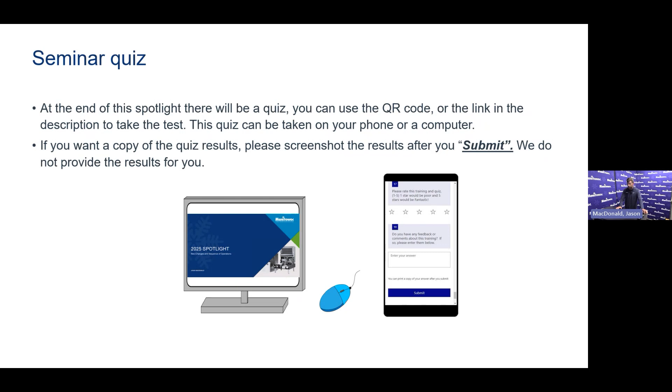All right, so what's different? What changed? Because the name didn't. Well, the refrigerant did, for one thing, but also the air filter now pulls out from the front. We have onboard water filtration. That was the big game changer to me.

You've been there, you've installed these machines. Sometimes there's not a lot of room to get the ice machine in place, let alone filtration. So now it's on board. And the thing that I really like personally is that's an auto bypassing head. Turn that ice machine off, pull the filter out, turn it back on. So, hey, the customer didn't have a filter sitting in the back room.

You didn't have one sitting on your service van. You're there to do some service work, preventative maintenance, corrective maintenance, just some sort of maintenance. That's what we do here. Well, filter's plugged. You can't tell a customer on a Friday night that their only ice machine is down because of a water filter. Well, you don't have to with this one. So, turn the ice machine off, take the filter out, and then just turn it back on. Come back on Monday with a filter and you're good.

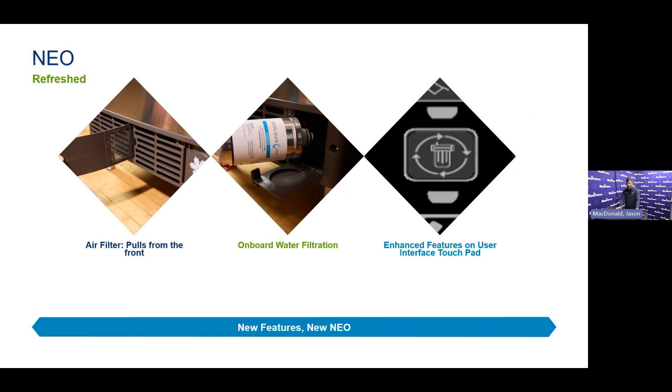We've also enhanced the touchpad. So you're going to see that here in a bit. We're going to take the dual screen off and we're going to show you a little bit about the ice machine. One of the big things that you're going to notice between our refreshed Neo and the previous iteration of Neo is that we've embossed the Manitowoc name into the door. So just coming from a distance, you're going to see that there alone.

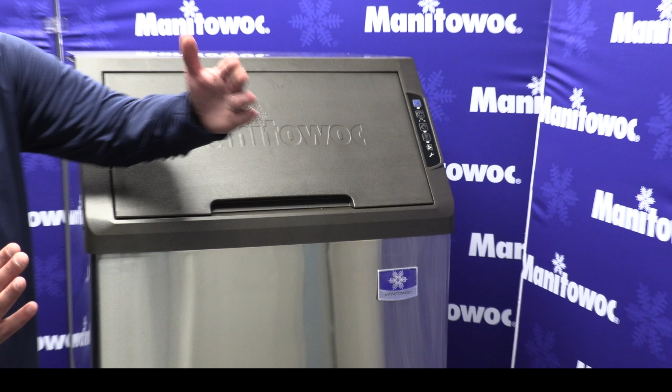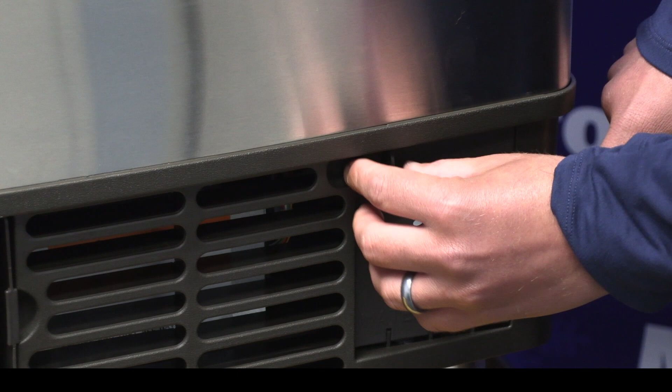And obviously the touchpad is different, which we'll show you a little bit more once we go back to the dual screen. And the big key here, this filter door. You're going to see the snowflake. That's where your water filter's hiding. So just pinch this door, this little tab here, and the door will come out.

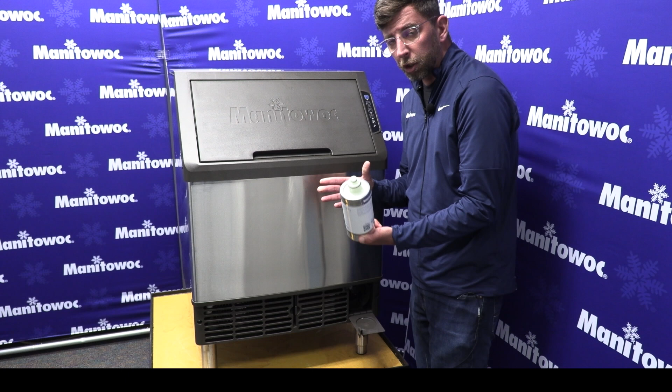Turn to the left, it removes the water filter. Get yourself a new filter. Go ahead and put the old filter off into the recycling, the garbage, whatever you have to do. Put the new filter in and turn until it seats. Push this door up. To get that click, I'm a big fan of pushing right here because you get that nice snap action right away.

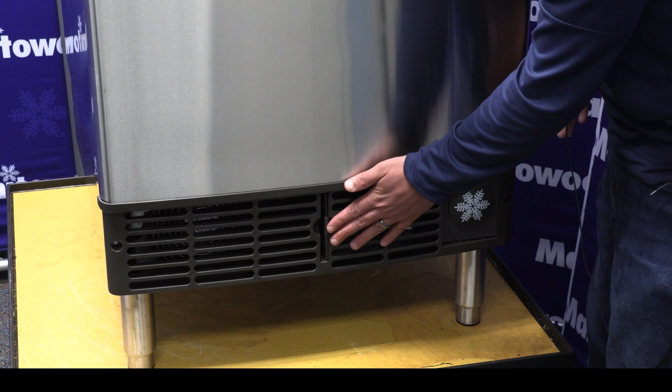Another thing that's different, as we discussed, the air filter pulls out of the front. To me, that's a big deal because on machines that did not have the front pull air filter, if you installed this ice machine without the legs, that tool-free access when you're pulling it down from the bottom, you lose that. So now, legs, no legs, just pull it out of the front.

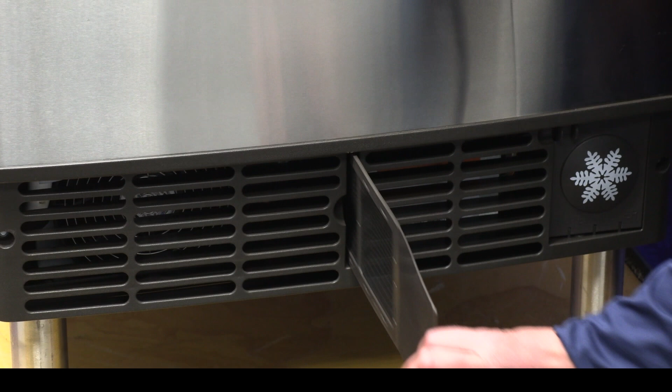And it's there. You can take this over to a sink, you clean it up real nice, you bring it back, you put it back in. Have to stress this part though. This is not keyed or poka-yoked in a way to prevent me from putting it in backwards.

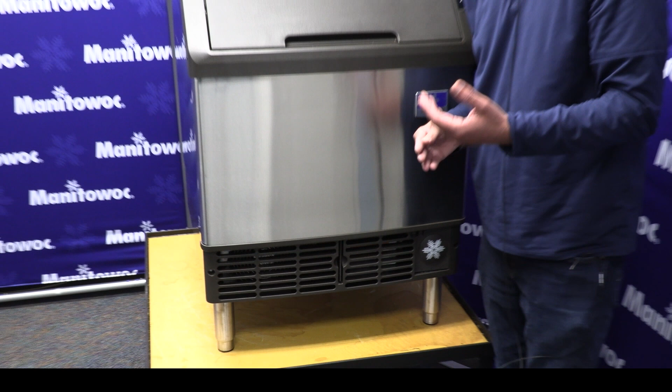I just put the filter in backwards. Well, that hard plastic there is covering about 25% of your air condenser. You don't want to be covering 25% of your air condenser. You want a clean condenser, breathing and being protected by an air filter. So take that back out, let's put that in correctly.

And it just runs along a track sitting there by the condenser. So those are the big differences you'll see on the machine. We're going to head back over to the desk and go to the split screen so you can see everything else a little more closely and more appealing.

So let's talk about what changed with the touchpad. We showed you that there's an onboard filtration light. Well, we're going to tell you about every light first.

So the on-off button, that blue button at the top, push and hold it for 3 seconds and let go. It's going to turn that ice machine on. You'll be able to tell because the blue light underneath will have turned on. Now we're in a normal sequence of operations.

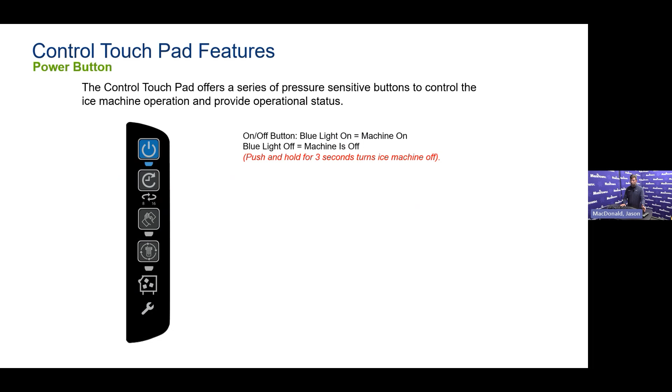Our delay button. Keep in mind, you cannot delay this ice machine when you're off - you're already delayed, until you turn the ice machine back on. So you can do a couple of things here. You can press it once and let go, it goes to 8 hours, then to 16 hours. Press it a third time, it turns it off.

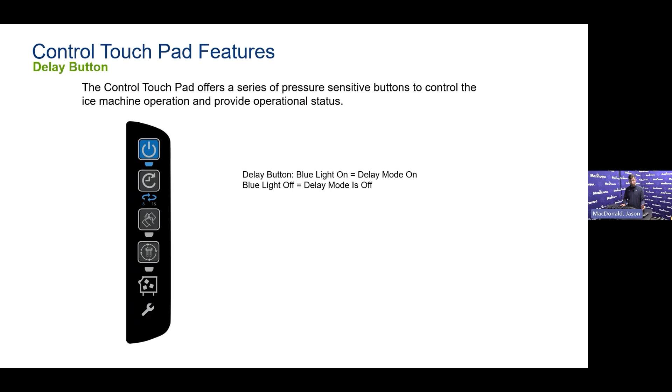But we have a repeat symbol there above those numbers. So push it, we're back to 8 hours. Now push and hold it, and the repeat symbol will come on. So now this machine will delay itself every single day from this point on for 8 hours, or until someone decides they don't need the delay anymore - they need 24 hours of production or anything else.

The clean light. We get this one a lot in technical service. Ice machine will not go into clean. I've had this call myself. The first thing I've always asked that person on the other end of the phone is, what's the ice machine doing right now? And the answer we usually get is, well, it's making ice.

How much ice is on that evaporator? Any? No, no ice on the evaporator. Well, turn the ice machine off. Turns the ice machine off, pushes the clean button and holds it. Lets go - the yellow light lights up and the machine goes into the clean sequence. You cannot go into clean from an ice making sequence of operations. You can only go into clean from the off state, which is not part of the ice making sequence of operation.

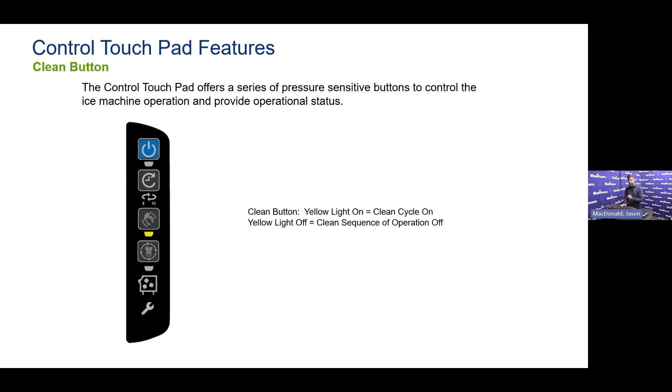But now this filter light - that's going to come on after 4,000 cycles. It's going to light up blue, telling you hey, it's time to change that filter. Now, this is not a timer - this is based on actual cycles, drops of ice. We froze ice, we harvested, drop - that's 1. It's going to count up to 4,000. At that point, that would have been 6 months of consistent operation, never shutting down because of full or anything else of the like. So 6 months, you're going to get this light to come on, but really it's going off a cycle count, letting you know it's time to replace that filter.

Now, what do we do with that? Well, you replace the filter and then you push and hold this button for 4 seconds. You just push and hold, let go. It's now going to create a flush and activate the carbon inside of that filter. It's going to energize the water inlet valve and the water dump valve, so that way it can get through and activate that filter for you, so it'll actually filter that water and allow water to come into the ice machine. That's going to take about 5 minutes. Turn the ice machine back on and let it start running. We have now reset that counter.

Now, we do not have a thing for you to see on this one, but if that light comes on and you know you're running off to the part house tomorrow to get a new filter, all you can do is push that briefly, 1 second, just push, and that light will go out for 24 hours. And there is a handshake that you could do to turn that light off entirely - see the installation, operation, and maintenance manual or your service technician's handbook.

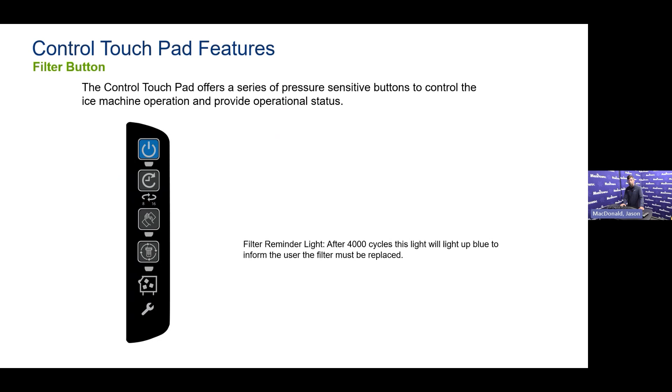If your customer has a full building solution for their water - reverse osmosis, anything else - that you do not want to be utilizing this filter because you've already purified your water, you push and hold the clean button, you push and hold the filter button, and you push and release the delay button, and it'll deactivate that light.

Now, my favorite light, the full bin light. This one is great from a distance for the customer and even for a service technician. If you're told this ice machine's not making ice, and you just walk up to it without doing any troubleshooting, you jumped the gun and made that phone call right away.

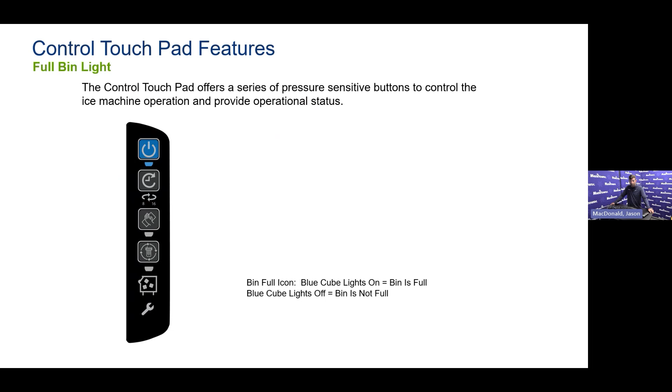First question I'm going to have for you: what lights are lit on the touchpad? If you tell me the cube light is off, that tells us we're not on full bin, or if that light turned on, that tells us we're on full bin. Well, you open up that bin door and there's no ice in there. Now we know what we have to troubleshoot.

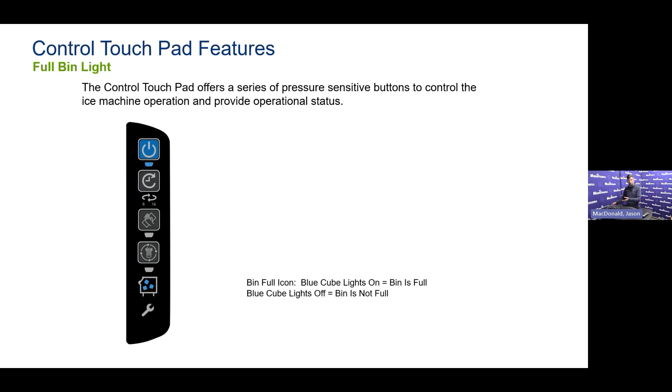Is the damper on? Is the damper in another room? Is the damper on backwards? Well, none of those things are true. We're really talking about changes here, not so much troubleshooting. But for those of you who've been doing this a while, if the damper's in place, magnets on the damper, everything's good, then you know you're looking at the bin switch or a loose ground or anything else of the like.

And then the wrench light. This wrench light can do one of a couple of things. If you saw what you see on the screen now, the power light is lit, the machine is operating, and the wrench light is flashing. That's letting you know I've had a safety limit. Not enough to lock me out, but it's happened. I'm letting you know I need your attention so I don't lock out.

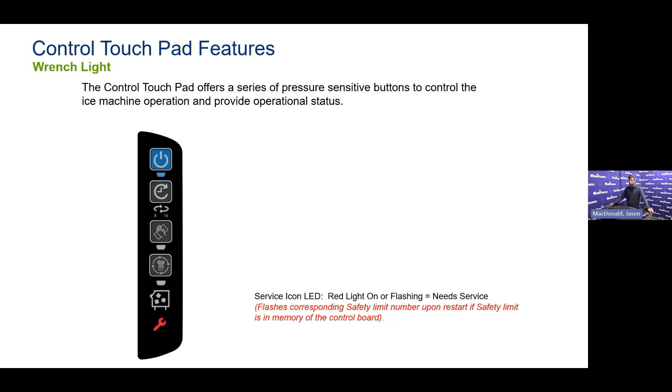Well, nobody paid attention. It goes to solid, and the machine's not running. Now we're locked out on a safety limit. To retrieve that safety, turn the ice machine back on and count the number of flashes. It'll flash 1, 2, or 3 times for the corresponding safety limit that would have shut you down.

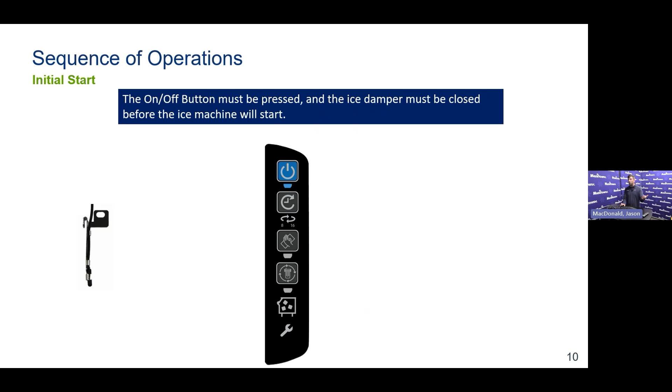All right, but let's talk about our sequence of operations and see what changed from the previous iteration of Neo to our new Neo, our refreshed Neo. Well, just like the old Neo, the new Neo, you push the power button to start the ice machine. Now we're going to start a sequence of operations. Keep in mind, current production is still utilizing the old Neo, previous iteration of Neo, with a water trough thermistor.

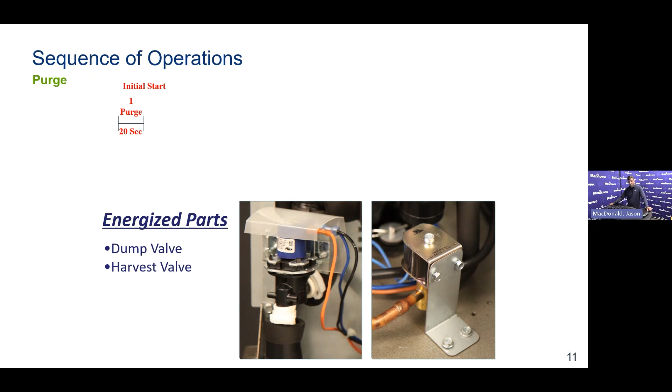All right, so we're going to purge first. At the initial startup, no matter how long it's been off—brand new install, turned off for 17 days, winterized and came back 3 months later, doesn't matter—the first thing we're going to do is a timed purge. Energize the dump valve and the harvest valve for 20 seconds. It's going to allow us to drain any mineral-laden water that's been sitting in there and to do a softer startup by equalizing our refrigeration system.

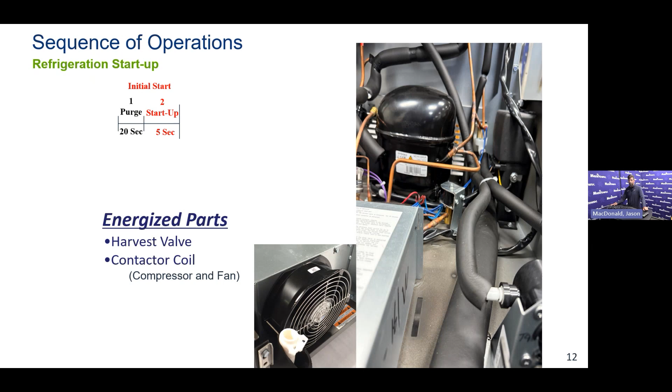Then we're going to start up. At this point, we're going to stop energizing the dump valve. We're going to leave the harvest valve on, and we're going to call for the contactor and start up the refrigeration system. This is going to last 5 seconds.

Now we're going to go to pre-chill. Pre-chill's purpose is to get the plate well below the temperature of the incoming water supply to prevent slush. That's why on the first cycle from an off state, or coming out of a full bin, it's going to be 2 minutes long. After a harvest, it'll be a minute long.

So at this point, we're going to start filling the water trough until the ice thickness float switch—that front float with the black wire—is satisfied. When that ball comes up, it'll create an open circuit and the high level float light on the board will light up. At that point, we're going to stop filling, but pre-chill is based on time. We're going to continue pre-cooling that plate as a way to prevent slush.

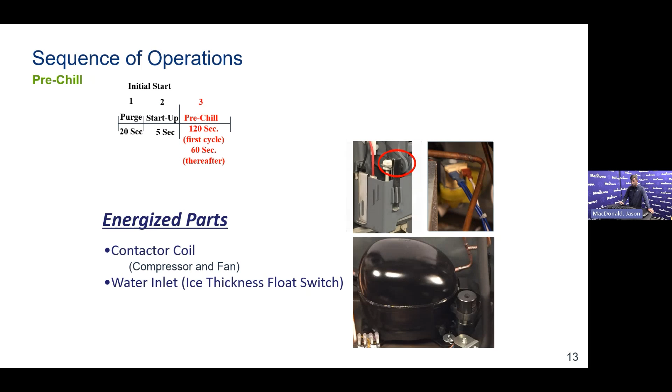One thing that needs to be highlighted: just because that float came up, you've got to keep in mind water swishes. You could just swish up and bring that ball up, but it's not all the way up. So as soon as we get that open circuit from that float, the board is designed and required to keep the water inlet valve on for an additional 5 seconds.

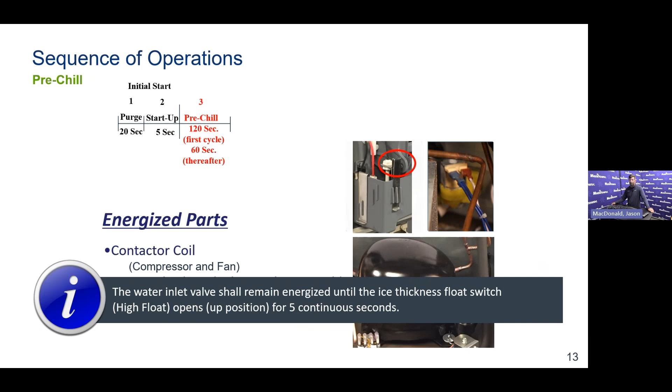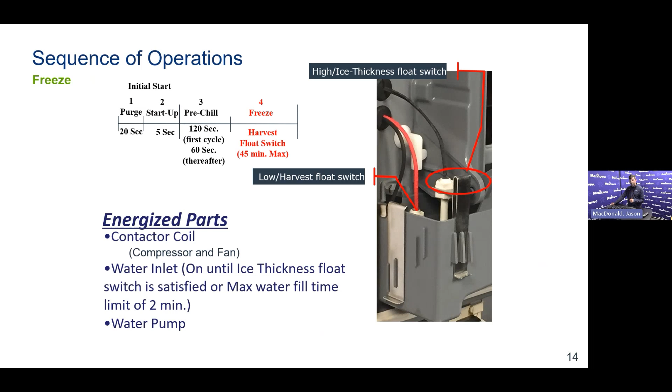We're going to have the contactor energized. The fan has the potential to run at this point, and if it's a water-cooled unit, the water regulating valve has the potential to let water through the condenser, and the water pump's going to come on. We will energize the water inlet valve again, or if we haven't satisfied in the first place, 2 minutes into freeze. Now that water trough thermistor is basically doing a second pre-chill.

When that thermistor senses 34-degree temperature, it sends a value to the board. The board says, okay, 34-degree water trough. So what we're going to do at that point is de-energize the water pump and basically just cool the plate again for 25 seconds.

As the water pump comes back on, we are going to do a 7-second fill of the water trough. This is independent of what water level is in the water trough. Nothing breaks up slush better than an injection of fresh water.

So having your water supply at the right pressure, 20 psi minimum, 80 psi maximum, putting the correct water valve in the correct machine should you have replaced one for some reason. They're not all the same. They have different GPM flow rates. Correct pressure, correct install, correct parts.

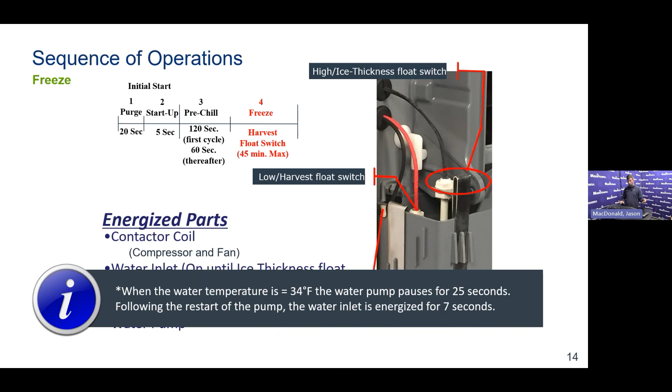This is important because if any of that's wrong, that 7-second fill can cause you to overflow the trough and cause you to stay in freeze a lot longer. Because what are we looking for to come out of freeze? Well, we're looking for the harvest float switch. Keep in mind, with that pump pause, should that thermistor have failed, whether failed closed or failed open, it is now going to default to time.

But in freeze, what we're looking for is to consume our water and for the harvest float switch, the one in back with the red wire, to go down and create a closed circuit in 45 minutes or less. Should we not consume that water, convert it into ice, and the float switch does not go down and does not create a closed circuit, at 45 minutes the board says that's enough. It's time for harvest whether you're ready or not.

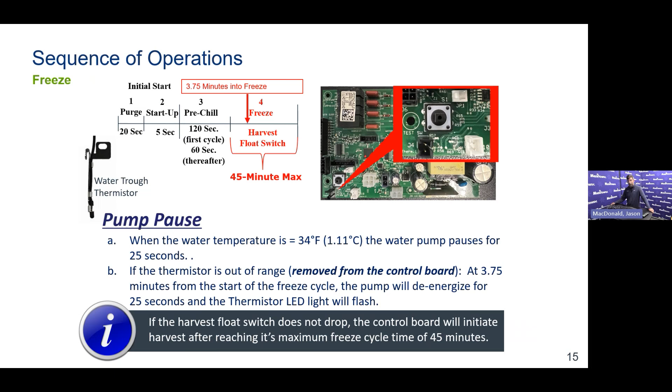So what do these switches do? Kind of really covered it, but the thing that throws everybody off is when the ball is up, the light is on, and it is an open circuit. And when the ball is down, the light is off and creates a closed circuit.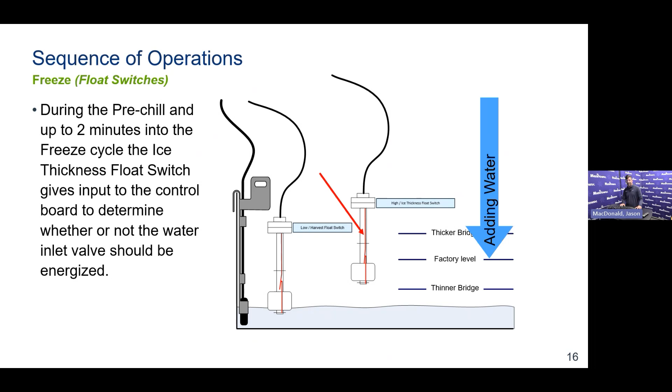So we're going to energize our inlet valve, and the front float, the ice thickness float switch, is what controls how much water comes into the system. Now we're in freeze, we're consuming that water, we're putting ice on the plate. That water's getting converted. Now, the back float, its only job, the harvest float switch, is to tell that board, I'm out of water. Well, if you're out of water, you should have an evaporator full of ice. It's time to harvest.

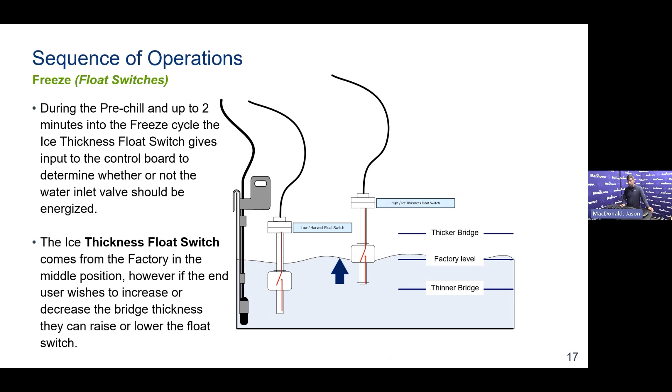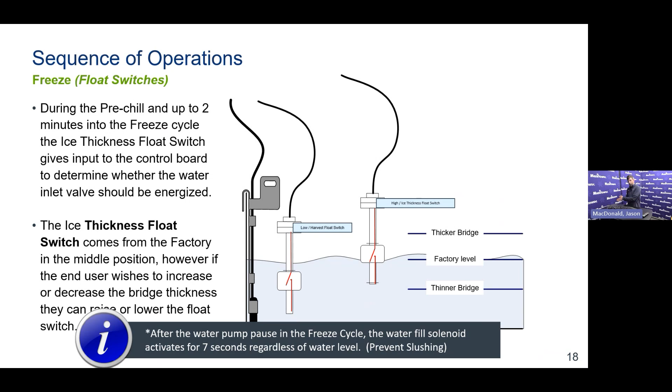And you can adjust the ice thickness float switch between the three settings. The left-hand one on the front of the water trough there will sit higher. You'll bring in more water. You'll have to convert more water to ice, so thicker ice, and the inverse is true. At the lower setting on the right, it sits lower, less water, thinner ice.

The harvest float is non-adjustable. It goes right where you see on the screen. There's a notch in that bracket that allows it to hug the bump out furthest to the back on the left side of the trough, and then the slit in the bracket sits on the next one closest to you. You see those other two, they don't have a purpose. Do not use them.

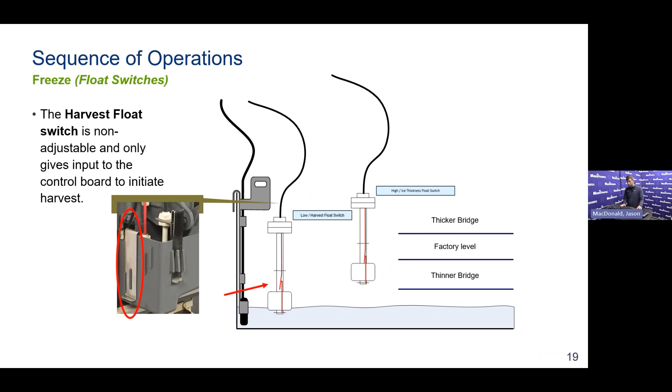Now harvest. We're going to talk about the whole harvest, and this is where something has changed as well. There has been a variable dump on Neo since 2018, but that changes here with the new Neo, the propane R290 version of the ice machine with onboard filtration. So if you are in a part of the sequence where it's supposed to purge, the old Neo did that every third harvest cycle. We'll talk about what it does on the new Neo. We would energize the dump valve, the harvest valve, and still have the contactor pulled in. We're now trying to melt part of the back of that sheet and allow it to slide off of that nickel-plated evaporator and fall into the bin, knock the damper, and go back into another pre-chill.

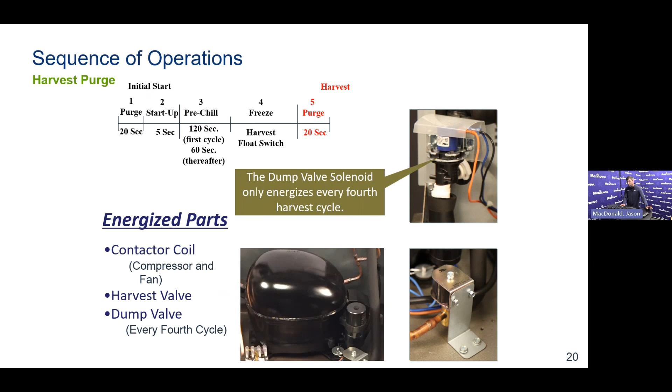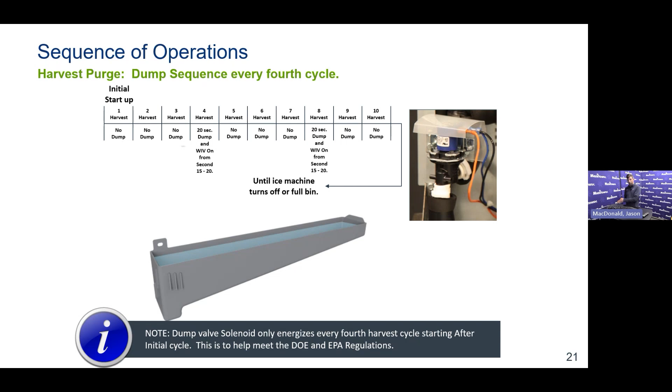Current production of the new Neo, this will happen every fourth harvest. So on initial startup, you're not going to dump and harvest because you dump on the initial start before you even get to pre-chill, before refrigeration starts, before you get to freeze. So out of the box, first cycle, second cycle, third cycle, we do not purge and harvest. Fourth cycle, we do, and then so on. You'll skip three harvests, and on the fourth you'll dump. This was done to meet Department of Energy and EPA regulations.

But let's say even filtration is not enough because there's just so much of something in your water, whether it's lime, iron, I don't know what it is. You need a bigger treatment, but you don't want to treat it anymore. Well, maybe dumping every cycle is the answer. So you can handshake your way out of this. Press and hold the clean button while making ice for 3 seconds.

Press and release the delay button, and you'll end up flashing 5 times to go into every harvest. And let's say now, hey, we've gone to every harvest, but that customer decided, you know what, we're really going to treat that water, because not only is the ice machine dealing with it, everything else is dealing with it. So we treated the water.

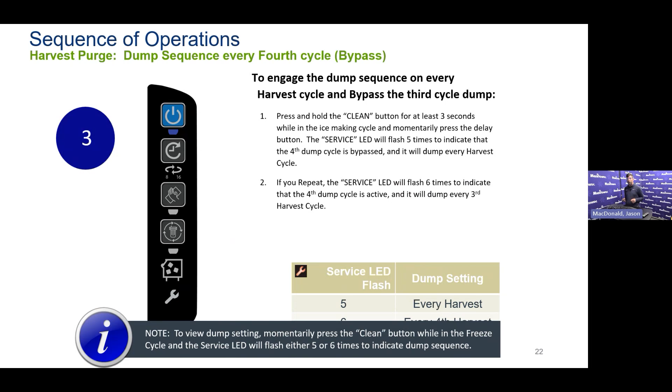Do the inverse. Press and hold the clean button while in an ice making cycle. Press the delay button and release. At that point, that wrench light will flash 6 times to go back to every fourth harvest.

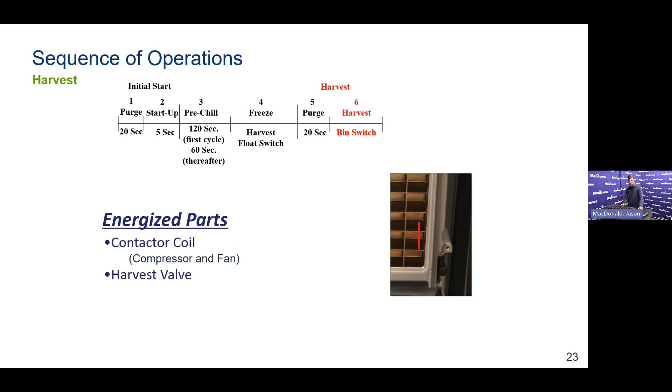Now, the rest of harvest, when we're not purging, whether it's cycle 1, 2, or 3 because you didn't handshake out, or it's cycle 4, or cycle 1 through infinity because you did handshake out, at this point we stop energizing the dump valve, and all we're doing is running the refrigeration system and letting discharge gas pass through the harvest valve to go to the evaporator and melt that sheet of ice. 7-minute maximum harvest. After 7 minutes, we're going back into another cycle.

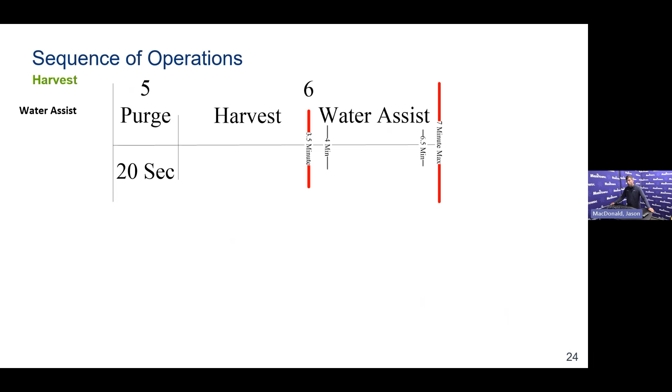We do have a water assist because after 3.5 minutes, whatever heat you had built up in freeze is pretty much gone. So at 3.5 minutes, we're going to energize the water inlet valve, and we are going to fill up the water trough until the high float, the ice thickness float switch, is satisfied, or 105 seconds, whichever happens first. At 4 minutes, we'll energize the water pump and start doing a water-assisted harvest, because again, whatever heat we had is pretty much gone. We need that water to give us a little more oomph to get us through this harvest in 7 minutes. At 6.5 minutes, we're going to energize the dump valve and start draining that water out.

At any point during harvest—whether it's a minute in or whether it's at 6:59—if that ice falls off, hits the damper, and the damper comes back up before 7 minutes has passed, you go back into pre-chill.

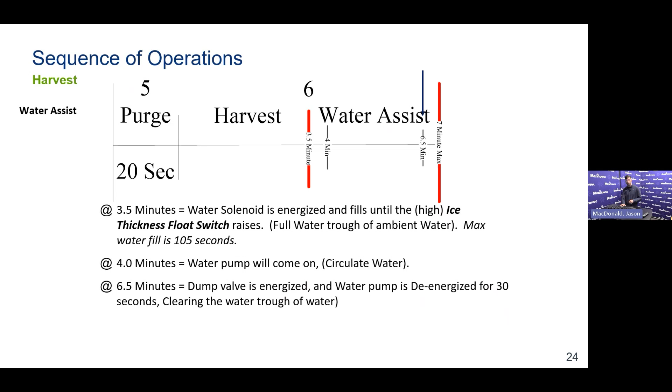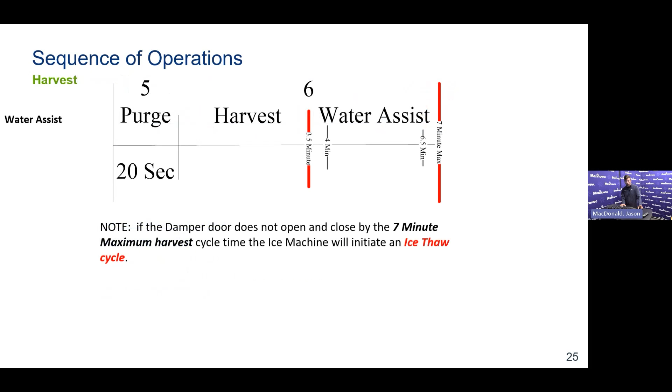If you do not harvest in 7 minutes, the damper started up and stayed up at 6:59, 7 minutes, we're going to go into a 5.7 minute water thaw. It's going to just run some water over that system and allow it to melt out.

But in the normal sequence, what we're looking for is: you go into harvest, the damper is up and closed. Ice slides forward, hits the damper, damper goes down, damper comes back up. If the damper opens and closes within 30 seconds, go back to pre-chill.

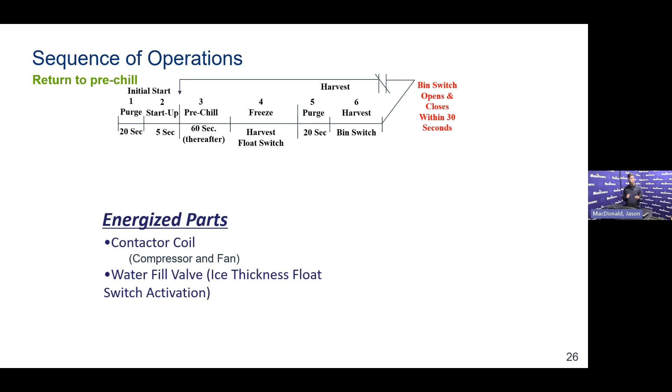However, if that damper comes open and stays open for 30 consecutive seconds, because there's nowhere for the ice to go, or because we melted out enough to make that batch not heavy enough to fall, you go into full bin. And then we're looking for two things on the Neo: we need the damper to come closed and a 3-minute delay to have expired.

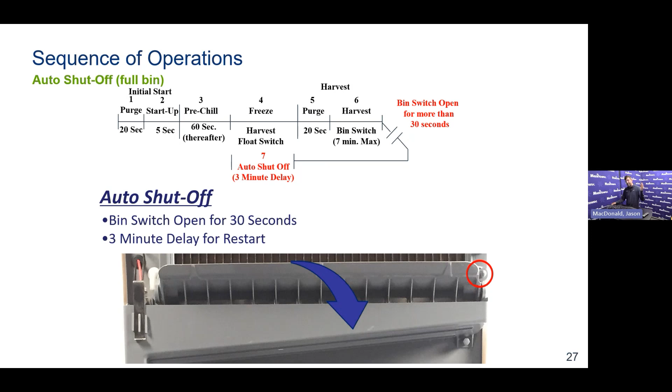This is not this, then. It's not the damper comes closed and then 3 minutes. It's the damper and 3 minutes. Why am I harping on this? Well, because I've heard false full bin a number of times since I've worked here. There's no such thing. We're sliding off 28, 29, 30, drop 31. Guess what? You have 2 minutes and 59 seconds of full bin to get past. The damper's closed, but you haven't been off on full bin for the full 3 minutes.

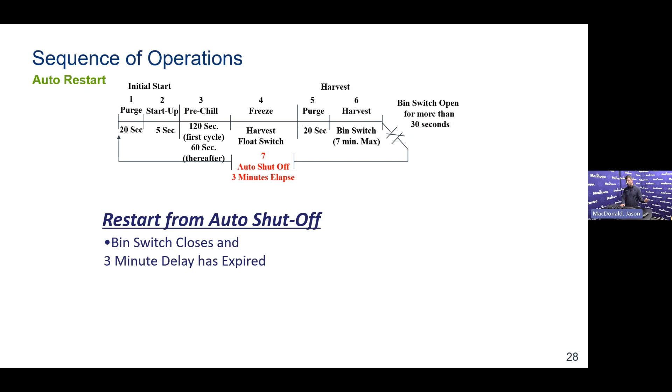Auto restart goes back to the initial sequence of operations. That'll also be true for what goes on with your every fourth purge on the current Neo, or every third purge in harvest on the previous Neo. And that ice thaw cycle, here's what it's doing, should you have not dropped in 7 minutes.

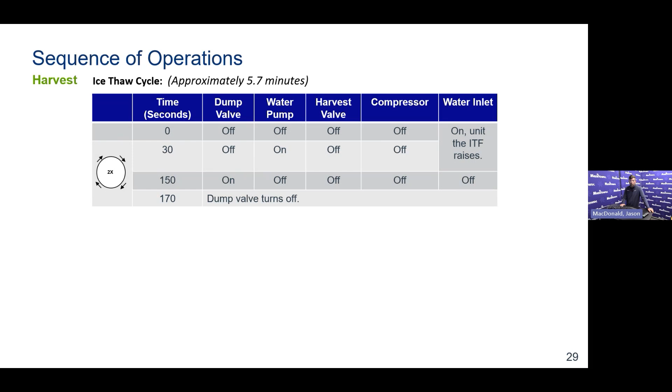Just telling you what energizes when and for how long. Again, it's 5.7 minutes, about 5 minutes and 40 seconds. It's just going to run some water to try to melt that out, and then it's going to start from the initial sequence of operations.

Another feature that was added to this machine is a clogged drain while in clean feature. Should the dump valve fail to drain the trough out and the harvest float switch, the one in back with the red wire, does not go down, it's going to terminate the clean cycle, and this is what you'll see.

The clean LED below the clean button will flash. The clean LED on the control board will also flash. So if you're seeing this and the machine's not doing anything, at that point you're going to probably want to check the trough first.

Let's be sure that it didn't just get all restricted, got a bunch of scale sitting in your drain line where it cannot drain out. Well, resolve that, put it back into clean, and let it do its job. Nope, empty trough? Well, be sure that the harvest float ball isn't just stuck because of some scale. Nope, not even that either.

Well, at that point, you're going to start troubleshooting that float. Again, we're not really going into troubleshooting today, so please refer to your technician's handbook, and remember that we told you today: when the ball is up, it is an open circuit, and when the ball is down, it's a closed circuit. I have put one of those floats back together backwards, and that swapped it on me, so be careful when you take these things apart.